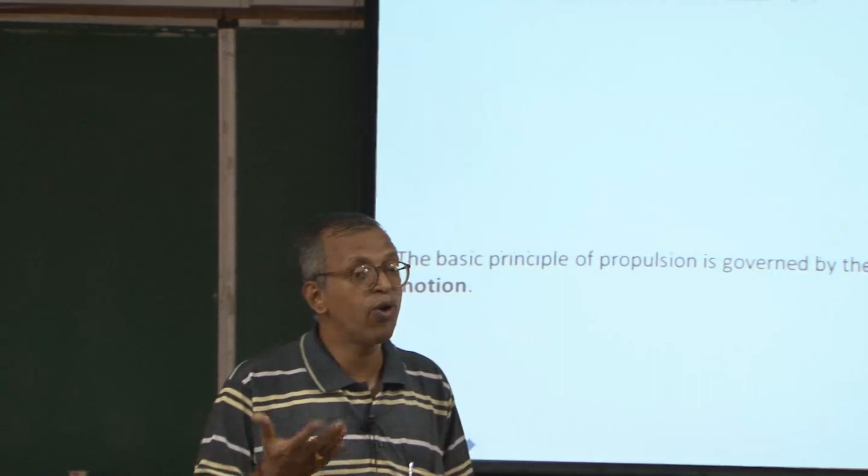When we are trying to impart motion to a body or object, what do we need to do? We will have to apply a force. Is it possible that we apply a force and just start moving? Certainly not - it must be an unbalanced force such that it overcomes the inertia or resistance, and it must be in a specified direction, meaning a particular direction, whether forward, backward, or sideways.

So this definition clearly indicates the existence of a body and a force to drive or push a vehicle, and this motion will be in a preferred direction, the desired one.

For example, if I walk, is it in a preferred direction? How am I walking? Am I applying a force or not? And if I am applying force, how is it acting on the body? All of you will know these questions, but we will discuss it just to make it clearer and have a feel for it.

So these are the basic principles of what we mean by propulsion. Now, when you talk about propulsion, suppose an insect is moving, or a snake is moving on the grass or ground, or a fish is moving in the water - will you call it propulsion, or will you call it something else?

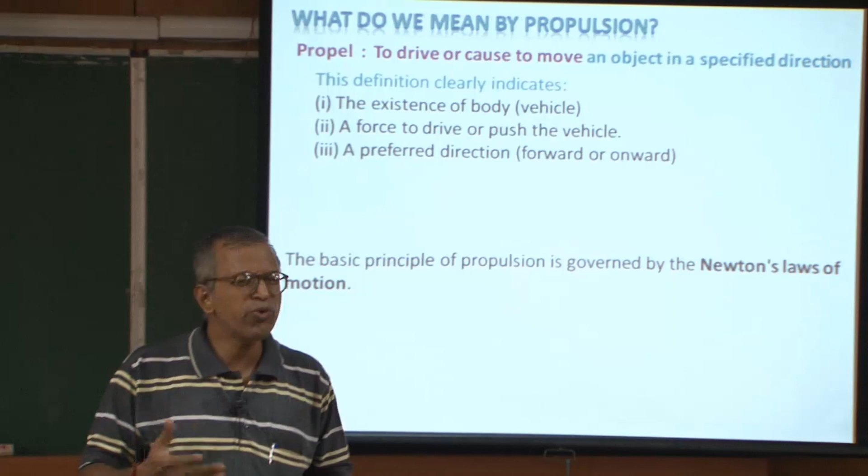Naturally it is propulsion, but we never use those terms whenever it is moving very often. However, because it is related to motion, it is related to applying a force which causes motion in a particular direction, therefore we call it propulsion.

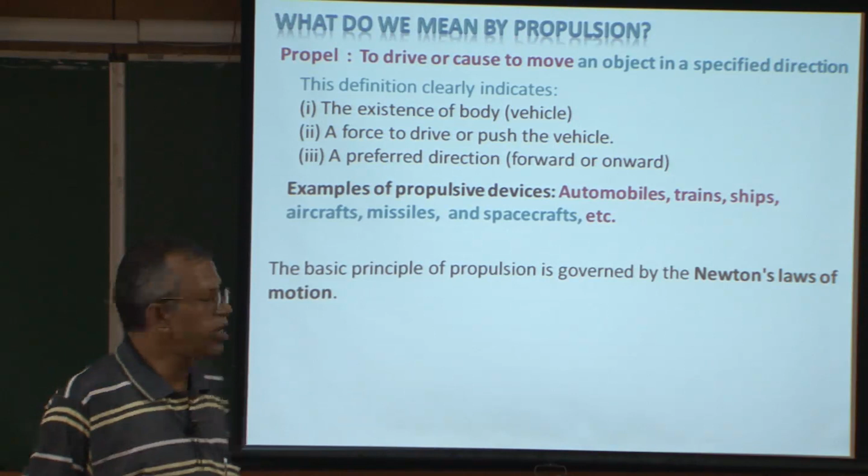However, there are several devices like automobiles, trains and ships which need to be propelled, and for that we need engines. Similarly, in aerospace propulsion, the propulsive devices are aircraft, missiles and spacecraft, and several others one can think of, but we will be concentrating on this.

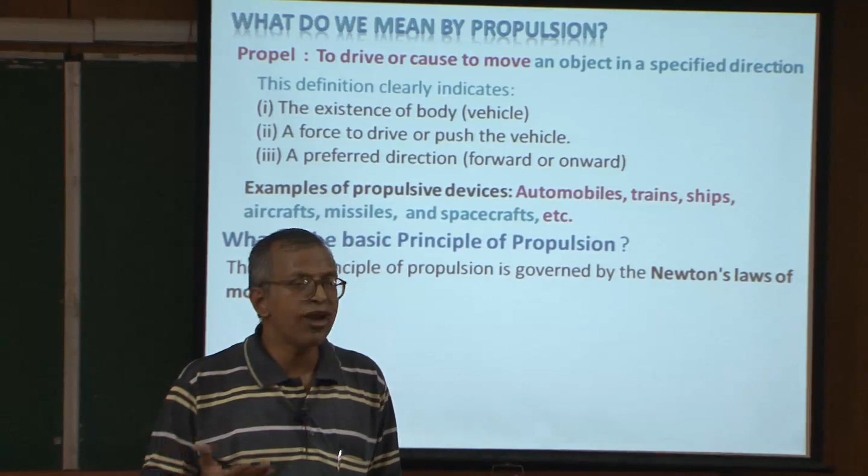Then the question arises, what is the basic principle governing the propulsion process? We know that one has to apply a force and it will cause a motion. Now, whenever it causes motion, then naturally the laws of motion come into picture.

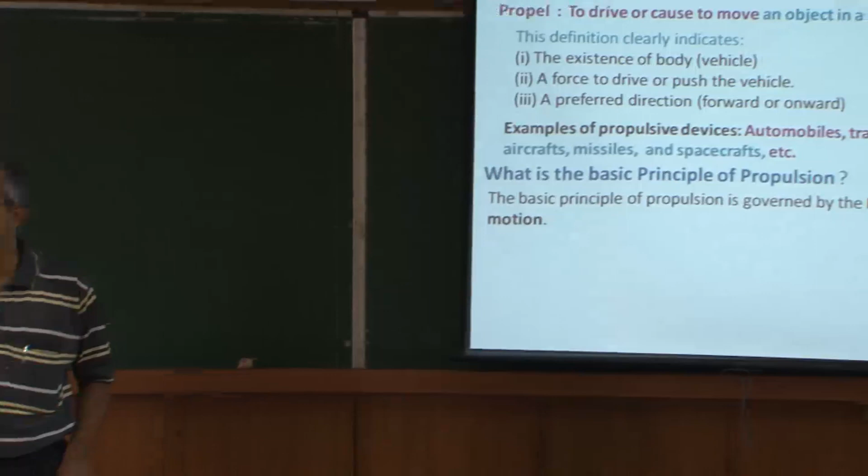You must have studied all these things in high school, but do you have a feel for it? What are these laws - first law, second law, third law of motion? Some of you may tell me in words, but did you experience those things? That is more important than mugging it up or remembering laws or applying them mathematically. I will take an example of whether a child experiences these laws or not.

If you look at a child, maybe 2 years or 1.5 years old, will they be experiencing these laws of motion or not? If they are experiencing it, why is it that when we grow up we are not experiencing it? I will give an example of how they experience it.

You might have observed a child keeps a toy in one place, moves around, and comes back to see whether the toy is lying there in exactly the same place. Let's say a baby or child is playing with a toy car, and you push the car in a particular direction so it moves and reaches somewhere, and you are catching, let's say, a ball - a lot of children like to play with the ball.

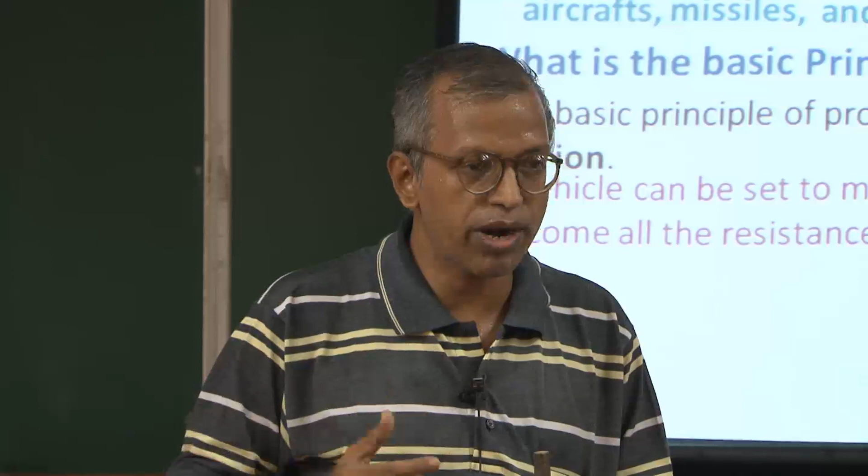Right, then only it will make a move, or motion is imparted to the body. Now if you look at what really changes whenever an unbalanced force is acted upon a body, there will be a change in momentum. That means rate of change of momentum will be proportional to force. So therefore we call this the second law of motion, and this momentum will be in the direction of the applied force or the unbalanced force. So unbalanced force acting on the body produces an acceleration because there is a change in the momentum of the body.

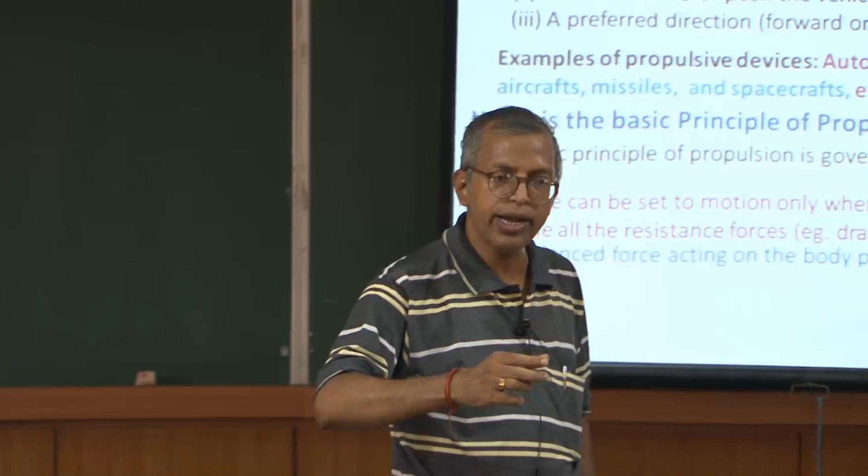Mass can be changing, or velocity, or both of them will be changing. But when we consider the mass to be constant, then change in velocity with respect to time we call acceleration. So therefore, generally we consider the second law of motion, in which unbalanced force is proportional to mass and acceleration of the body.

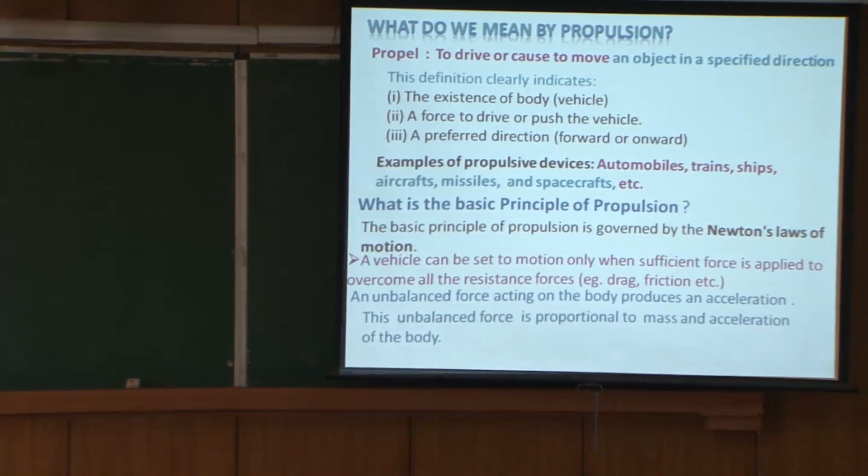It can be expressed as a mathematical formula which all of you know: F is equal to ma. F is the force, m is the mass of the body which is about to move, and a is the acceleration imparted to the body due to the unbalanced force, and the direction of this motion will always be along the unbalanced force, and force is a vector quantity, as all of you know. So this is the second law of motion.

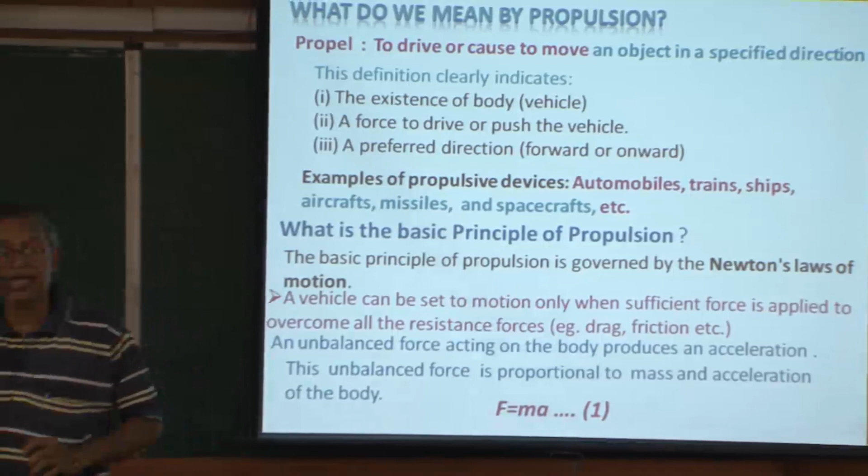Then what is the third law of motion? Every action has an equal but opposite reaction. When you talk about this, for every acting force there is an equal but opposite reacting force. What is the meaning?

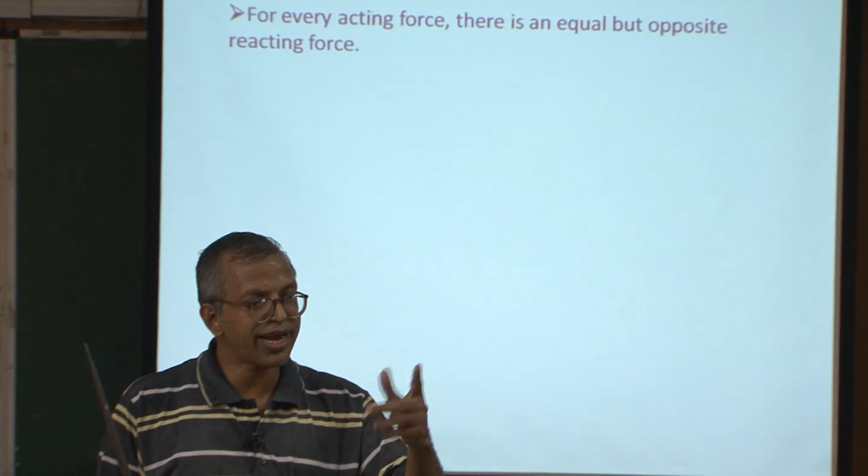So as I told you, to impart motion to a vehicle, a reacting force must be acting on the vehicle, that is very important, otherwise there will not be any motion. I will take an example, this is a cannon, right.

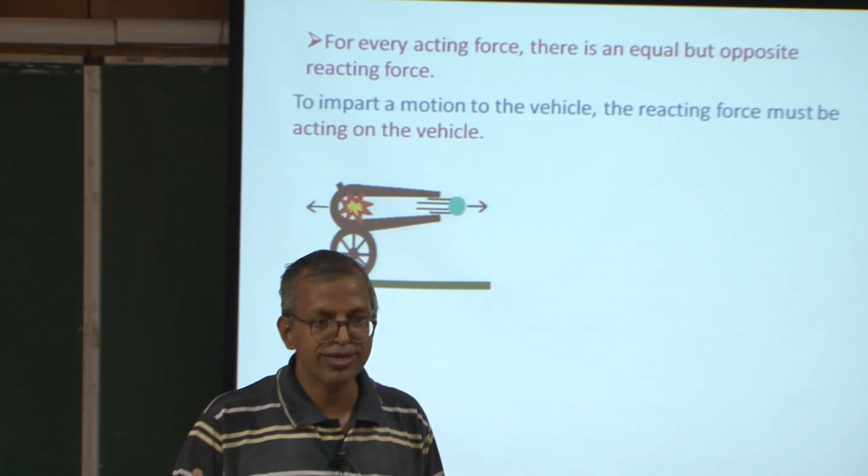Cannon will be imparting a motion to a ball which is there due to the explosion inside the cannon. As a result, the acting force will be on the ball and the reacting force on the cannon. Now, if you look at this cannon, its mass is very, very high as compared to the ball's mass. So therefore, the opposite force which will be acting on the cannon will be very, very small.

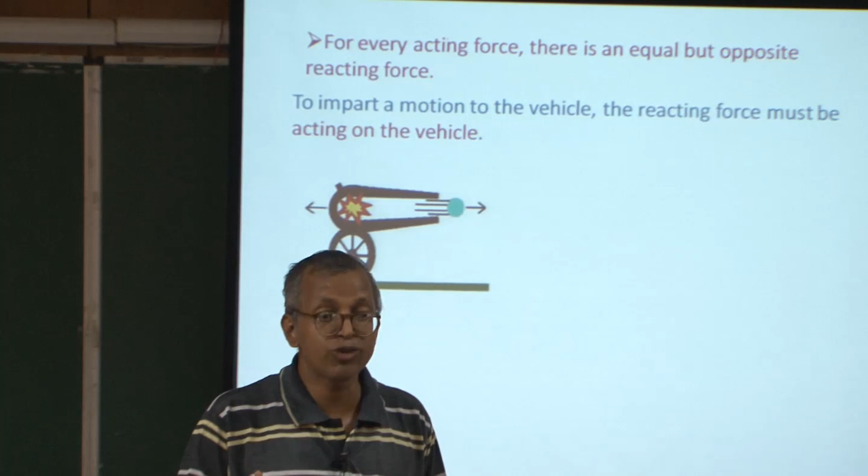I remember that when I was in high school, I was in NCC, my instructor asked me to keep the butt of the gun, that is the 303 gun, along with the body, but unfortunately I did not listen to his advice, and I got a pain whenever I triggered the bullet and it came and hit my body, because it is moving. So, opposite reaction is there.

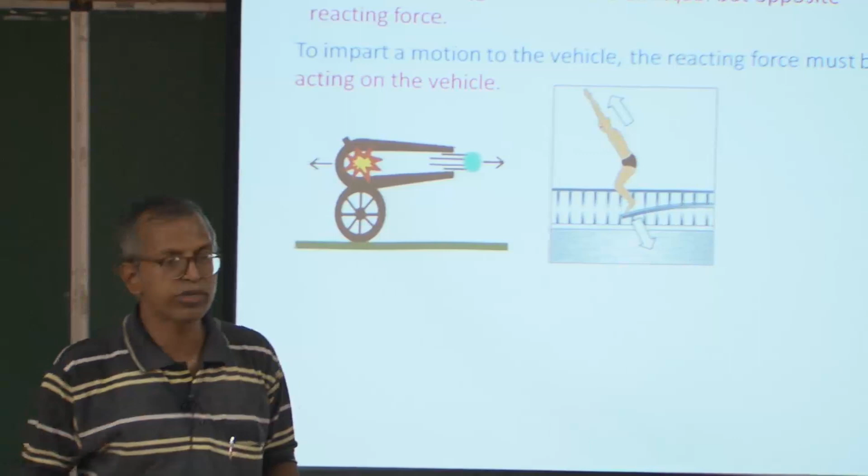Similarly, several other things one can think of. For example, in the swimming pool, there will be a springboard on which you push, and then you get jumped and put into the swimming pool. So, this is another example. The way we walk is also by the third law of motion.

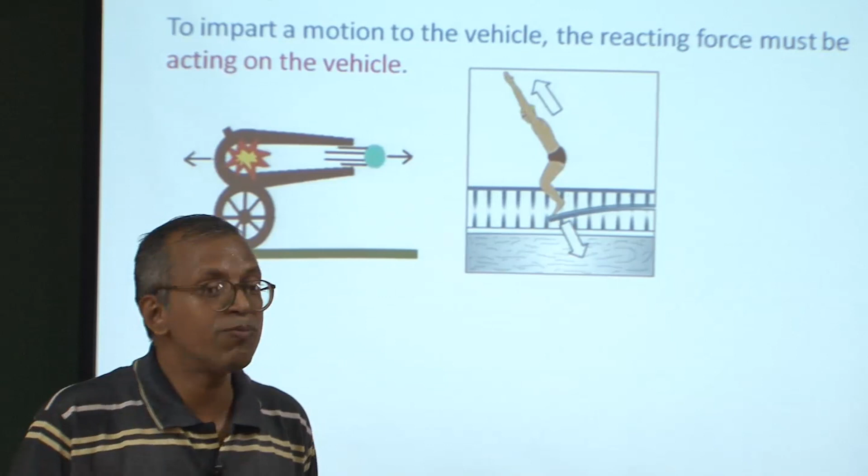And in our scriptures, we talk about every action having an equal but opposite reaction, that is known as the law of karma. Some of you may not be knowing what that is. Nowadays people are not worried about it, but it is very important to look at that law of karma, which is similar to the third law of motion.

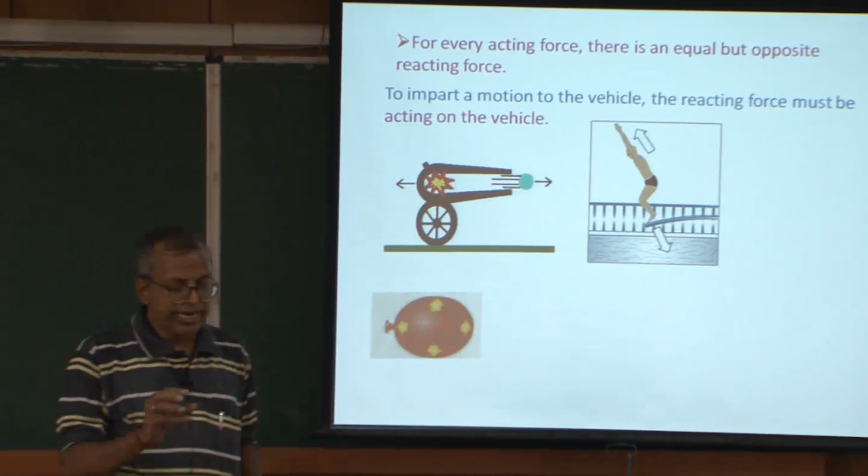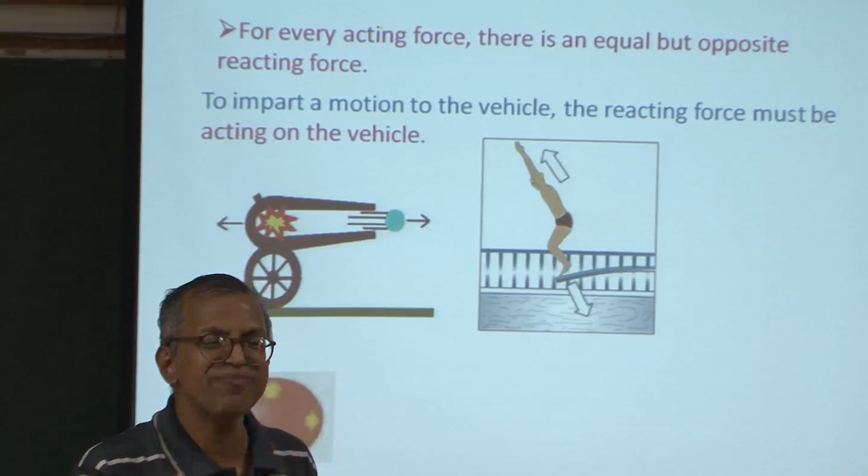So, we will take a balloon which is inflated and it is in equilibrium because the pressure acting on this balloon is in equilibrium with the atmosphere. However, it is having higher pressure. You may think how it is happening, because it is an elastic medium. So, whenever it is in equilibrium, if I remove this stem or allow the air to move, what will happen?

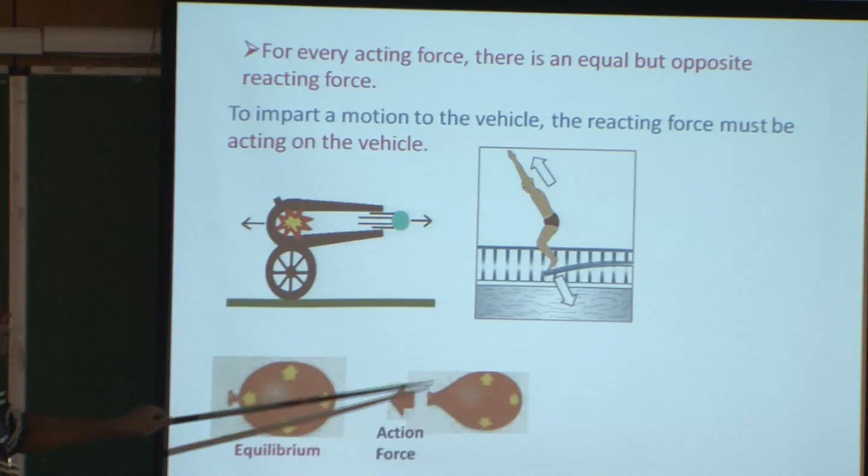The air will be moving out of this balloon and there will be an acting force, or the action force, and there will be a reacting force along with this direction. As a result, the balloon will move away from the same place.

This is a typical experiment that people do, at least it is there in the high school book, but nobody does the experiment today, either in high school or secondary school or even in engineering college. That is the fate of our education system, which is very bad.

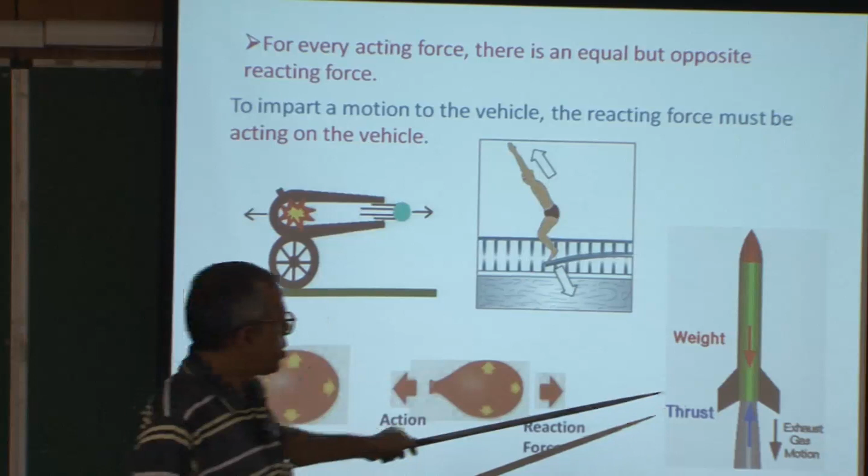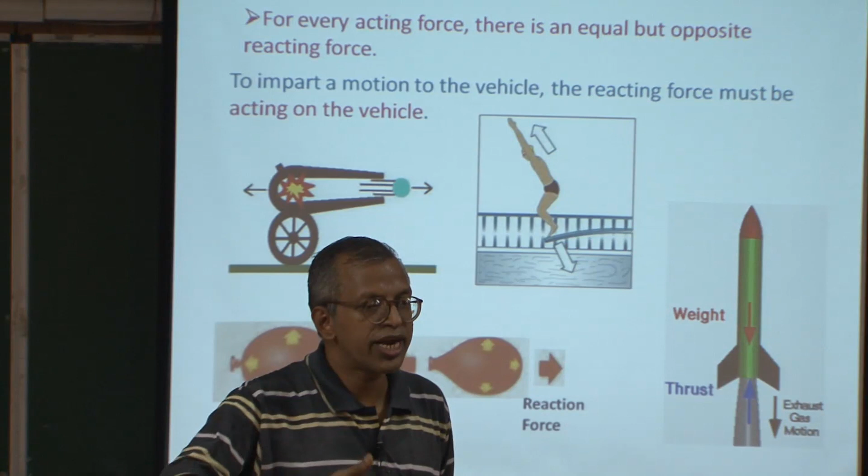Now, this is the basic principle by which rocket engines work. I will show you a figure where the hot gases will be ejected out of the nozzle. As a result, it will impart a thrust, which must be much higher than the weight and also the frictional forces, the drag, so that it will make a move. So, this is the basic principle of rocket propulsion.

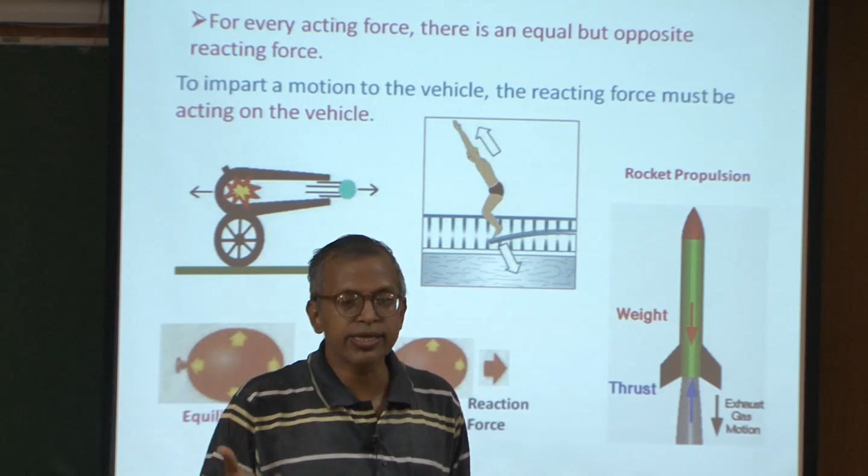Now, we will take this balloon and look at what the gas turbine propulsion will be. I will take an example. But before that, I would like to ask you, we are talking about aerospace propulsion, but is there any occasion for us to think about life propulsion? That means we propel our life. You take a birth, from the birth to the death is one journey in a particular direction. Have any of you wondered how I will propel my life, so that my life will be smooth and good, I can contribute, I can reach an excellent state?

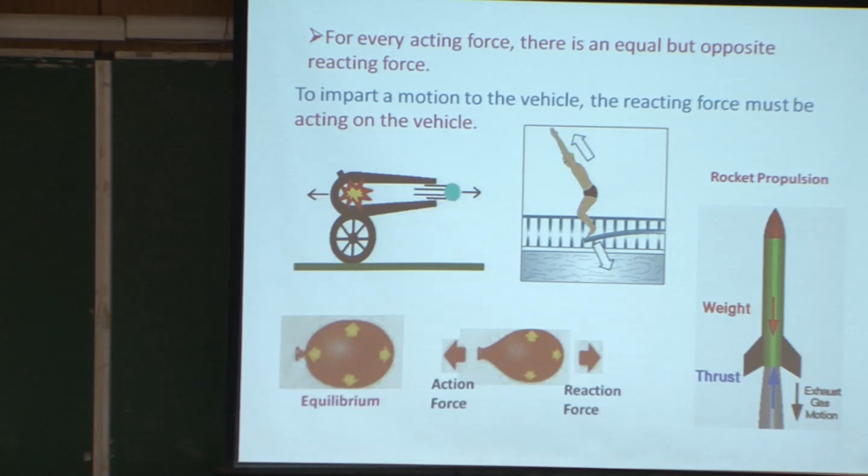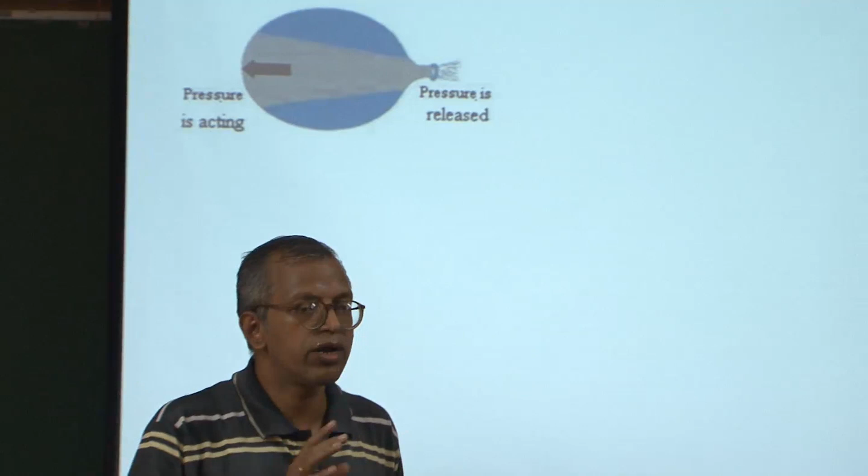I do not think so. Some of you might be thinking, or some of you may not be thinking, and that is the main objective of all education according to me, not what we do. So, I would urge you people to think about this important aspect of how to propel a life, which is more important than your aerospace propulsion. Because of that, people do not know how to propel a life. All the problems we are facing in society are caused because of not adhering to the principles of humanity.

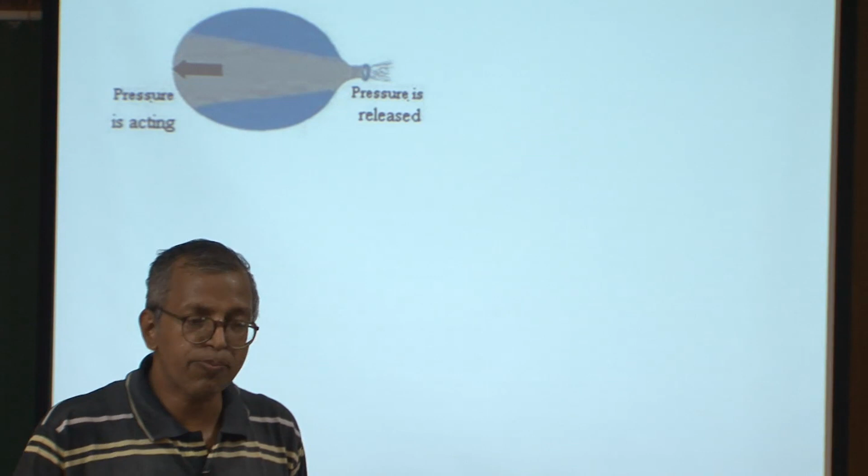So, I do not want to get into that, but rather let us say that there is a balloon which is acted upon by pressure, and the pressure is released, and whenever the stem is opened, it will act like a nozzle and it will move. But what will happen after all the pressurized air goes out? Then the balloon will be flat and it will not move at all. Suppose I take this example or analogy, I will think of how to make it continuous. What is the way? Can anybody tell me?

I want to make it move. So, what is the way out? Make my balloon move forever, or as long as I wish. That means I need to supply the air continuously. How can I do that?

I can think of pushing some air. What will I have to do? I will have to think of using a compressor, or an air intake. But the compressor will have some mechanical component, a mechanical rotor which will move and ingest the air into it.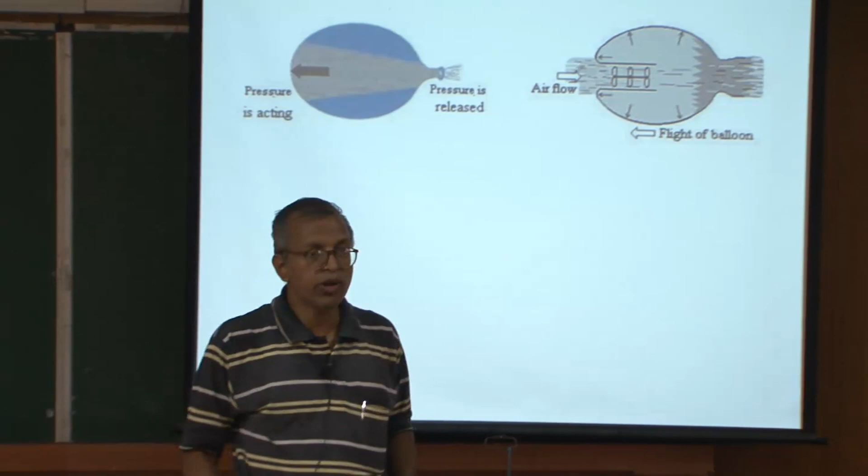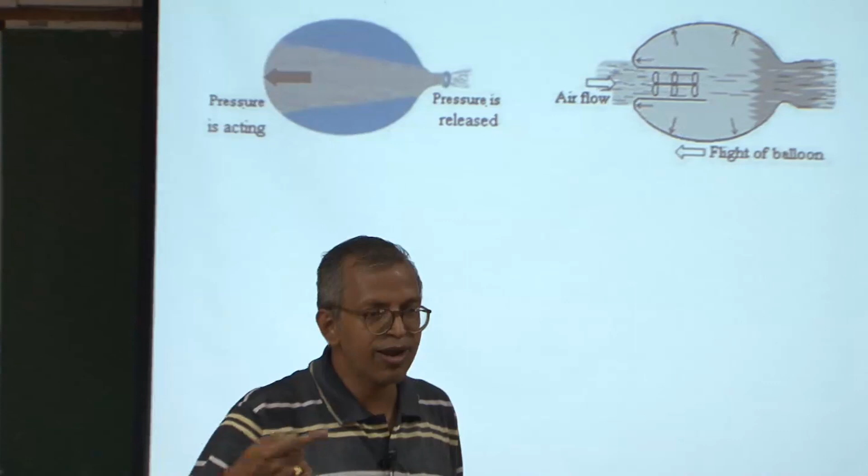But whenever I have this movement of the compressor, I need to move it. How will I make this compressor move? I will need another device which gives power for the compressor blades to rotate, so that air can come in.

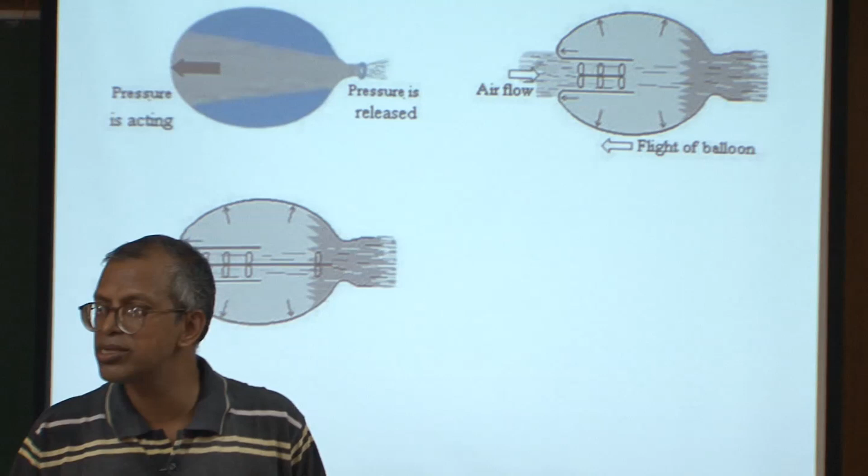And for that I need a turbine. But how will this turbine move? It cannot move on its own. So naturally I will have to give some energy, because if I ask where does this force come from, it comes from energy. Without energy, can I have a force? Certainly not, it's not possible.

So what will I have to do? I will have to use energy. Energy can be any source - it can be chemical energy, nuclear energy, solar energy, or any other form. Energy has different forms.

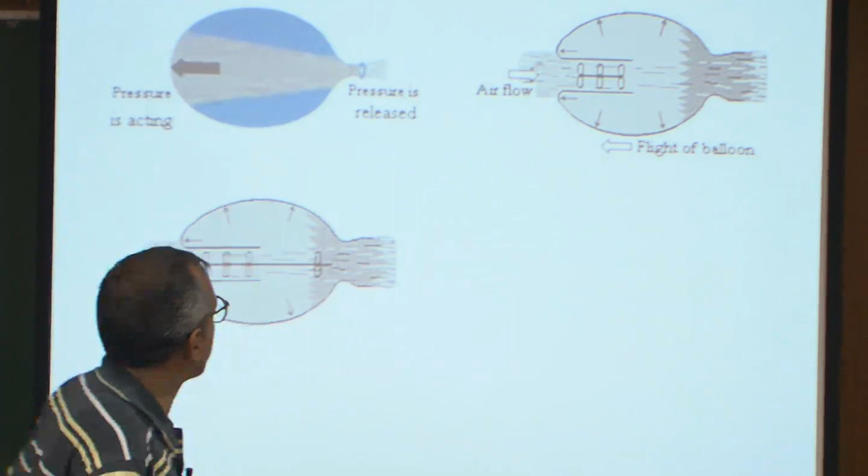So I will have to use some energy source so that I can extract mechanical work in the turbine, which will run the compressor. For that I need a combustion chamber where I will be using some chemical energy, for this example.

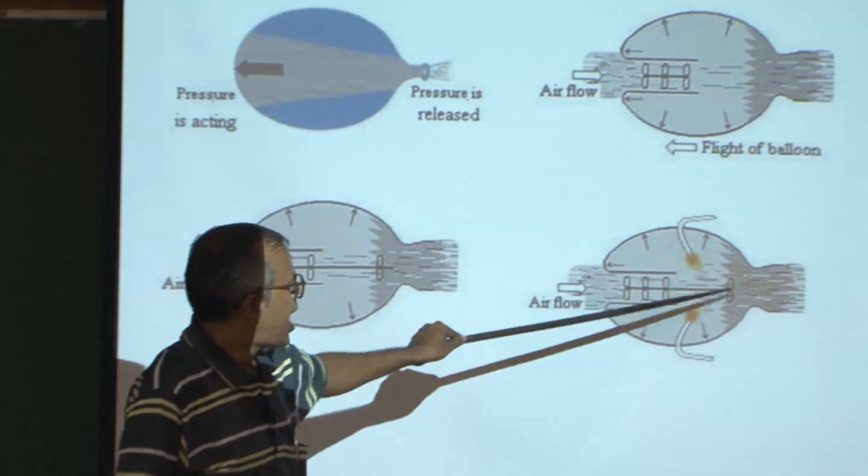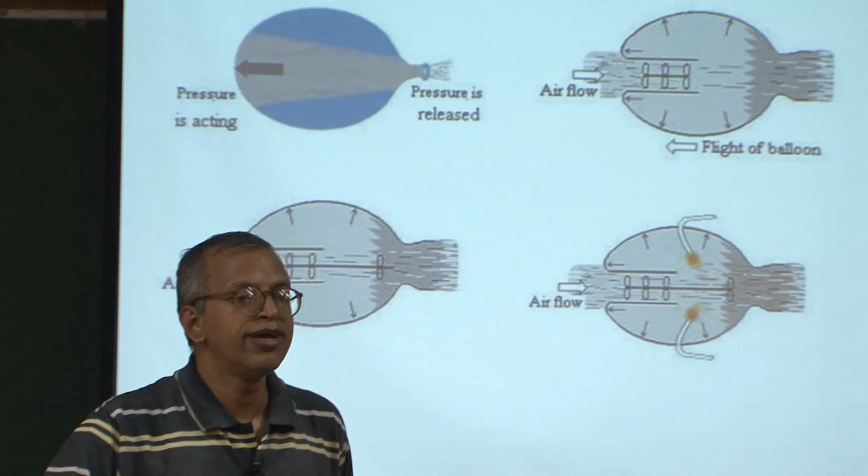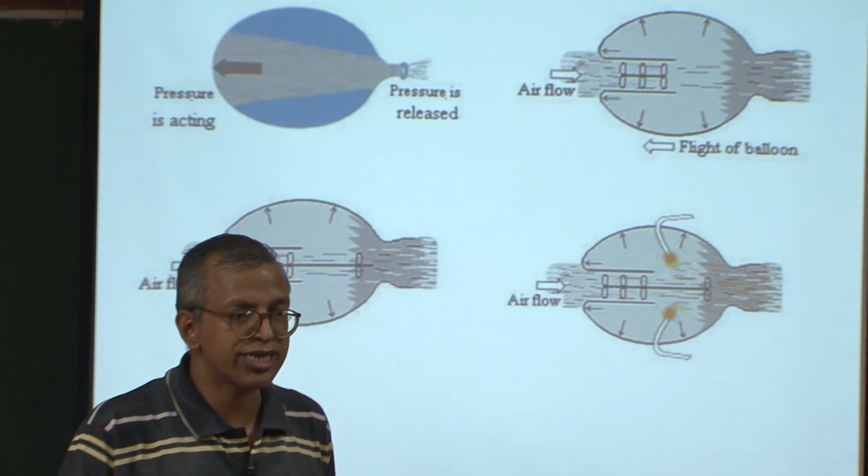If you look at a gas turbine, how many components does it have? One is the air intake through which air enters the chamber, and the compressor which sucks the air and raises the pressure. There's a combustion chamber which gives energy to sustain it. It's expanded in a turbine, and this hot gas is expanded further in a nozzle to give thrust. This comprises your gas turbine engine - this is the balloon analogy of a gas turbine engine.

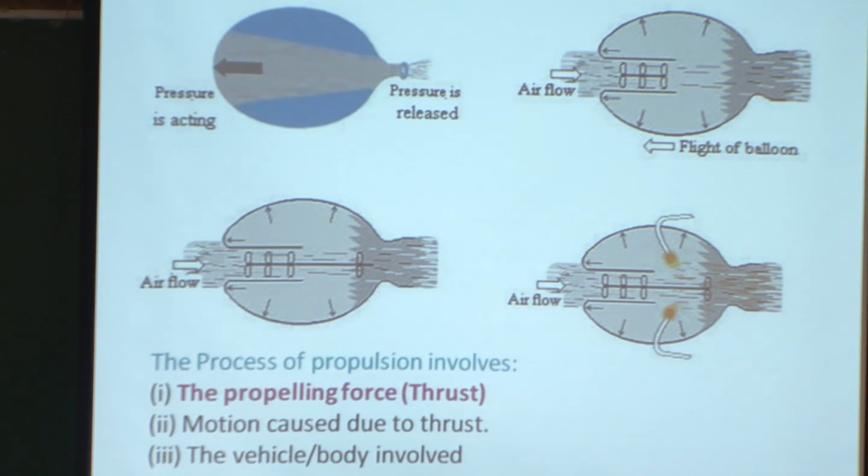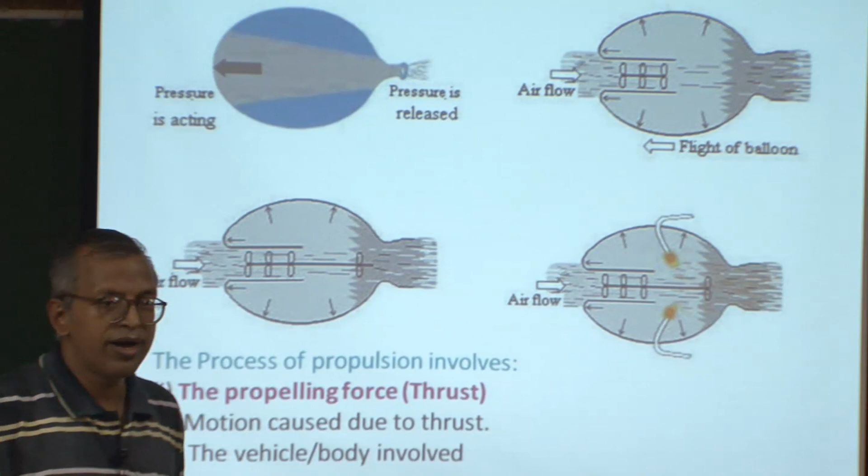If you look at all these concepts, there are three components - the processes involved in propulsion are three. One is the propelling force, the thrust. Another is motion caused due to the thrust, which is basically flight dynamics or aerodynamics, and vehicle body is involved. Whenever we talk about the body, it is basically a structural thing, so that becomes structural engineering.

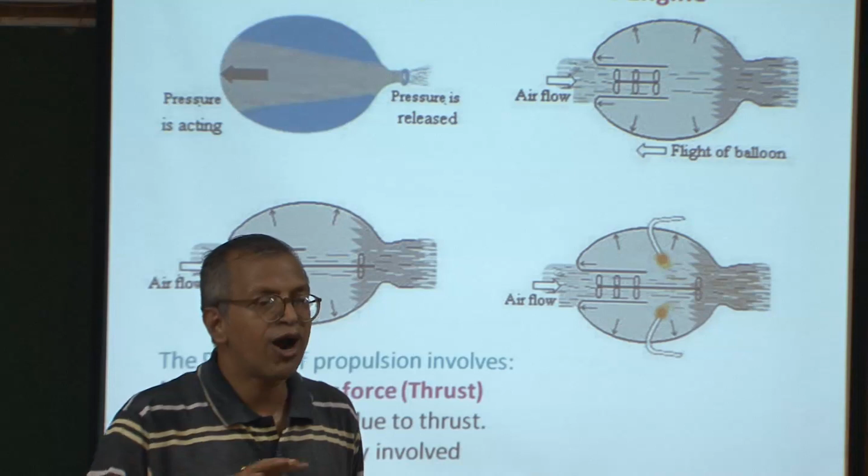Then we will be looking at propelling force, which is the force we will try to generate, and whenever we generate this force we need to use energy. We will be thinking about how to use this energy for generating a torque or a thrust or a force, such that it can make the vehicle move. So the whole scope of aircraft propulsion or aerospace propulsion relates to how to utilize this energy for generating thrust or force, to make it move or impart motion to a vehicle.

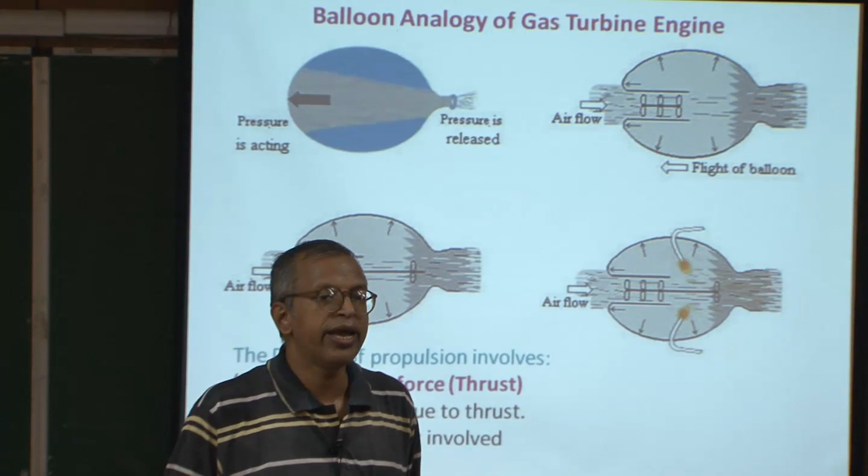This is the part we will be concentrating on - we will be looking at the aerothermodynamics of propulsion. With this, we will be covering the subjects in the following manner, as I told you.

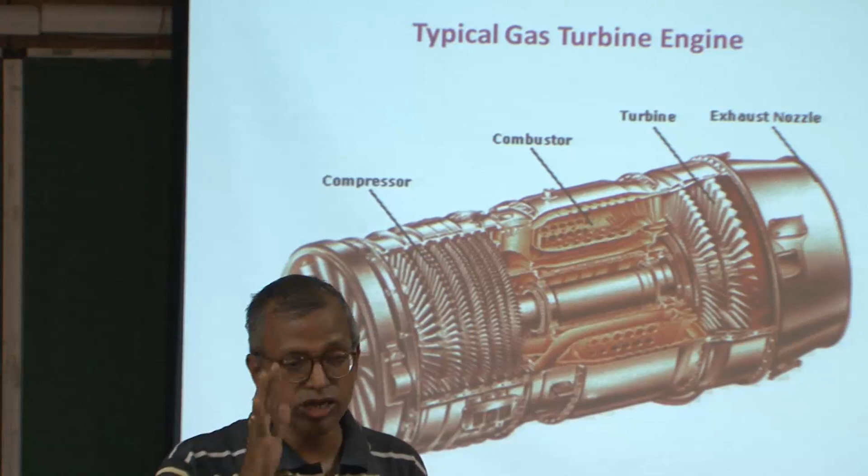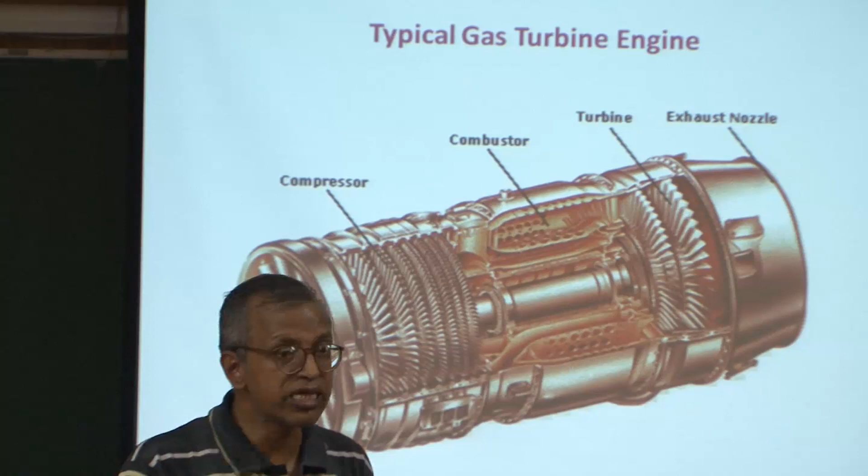In this course, I will start with an introduction to propulsion. I have already introduced some aspects, but I will give you an overall view of the whole gamut of propulsion in a nutshell, and then we will concentrate only on the gas turbine engine and the rocket engines.

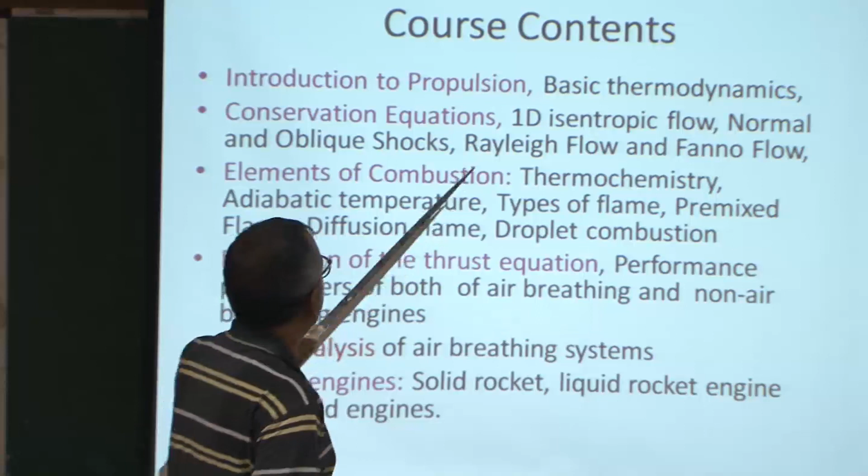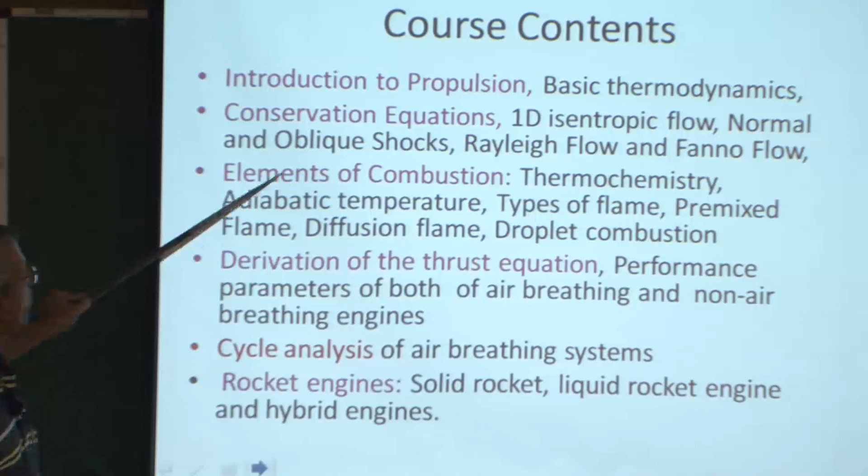For that we need to review the basics of thermodynamics. Then we will look at the conservation equations we will be using, that is one dimensional isentropic flow, which occurs at high velocity and may lead to the formation of shocks. So we will discuss normal shock, oblique shock, and then move into Rayleigh flow and Fanno flow. Some of you may already know these, but we will recapitulate and relook at them from a different angle. Since we will mainly be dealing with chemical energy for our propulsion devices, we will also look at the elements of combustion.

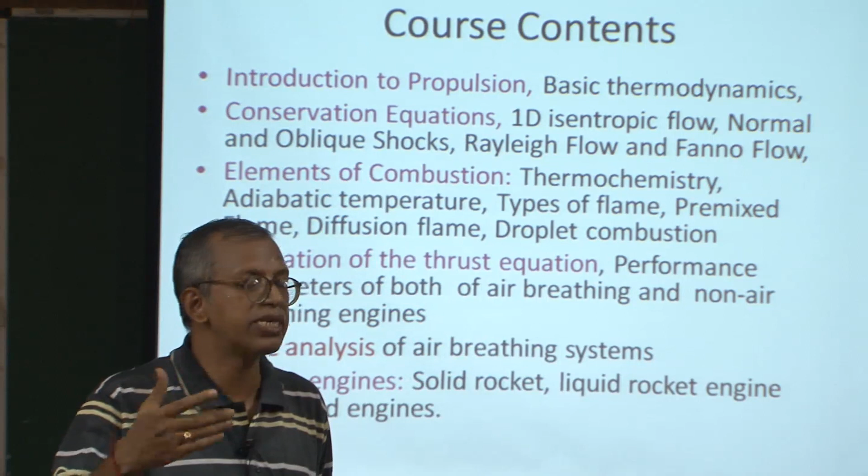This portion of the course will be covered to make you adept in the fundamentals required to delve into aerospace propulsion.

After this, we will look at the derivation of the thrust equation, covering performance parameters for both air breathing and non-air breathing engines. Then we will look at cycle analysis of air breathing engines, including real cycle analysis and ideal cycle analysis, and how these can be used for the design of an aircraft or aero engine. Finally, we will briefly look at solid rocket engines, liquid rocket engines, and hybrid engines.

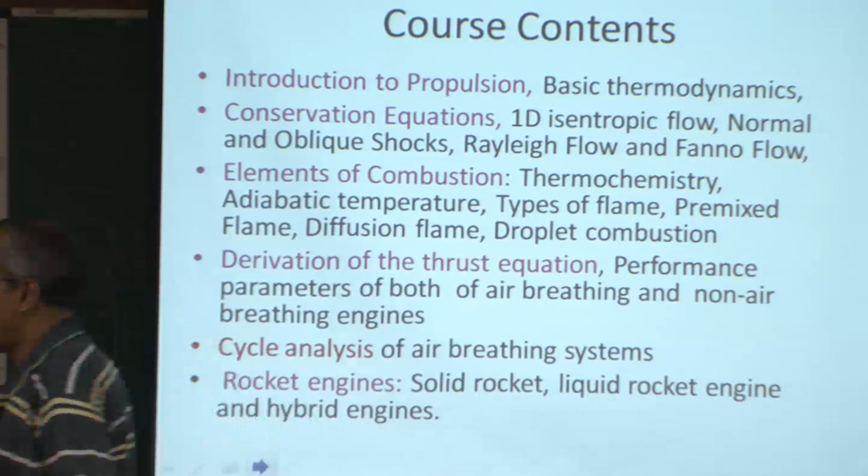We will be referring to several books, which I have jotted down a few of. For the aero engines we will look at Gas Turbine Propulsion published by Anamaya, and for fundamentals of combustion we will look at a book by myself, D.P. Mishra. For engineering thermodynamics we will look at some portions by Cengage. Besides this we will refer to Mechanics and Thermodynamics of Propulsion by Hill and Peterson, the classic book Rocket Propulsion Elements by Sutton and Biblarz, and Aerothermodynamics of Gas Turbine and Rocket Propulsion by Oates.

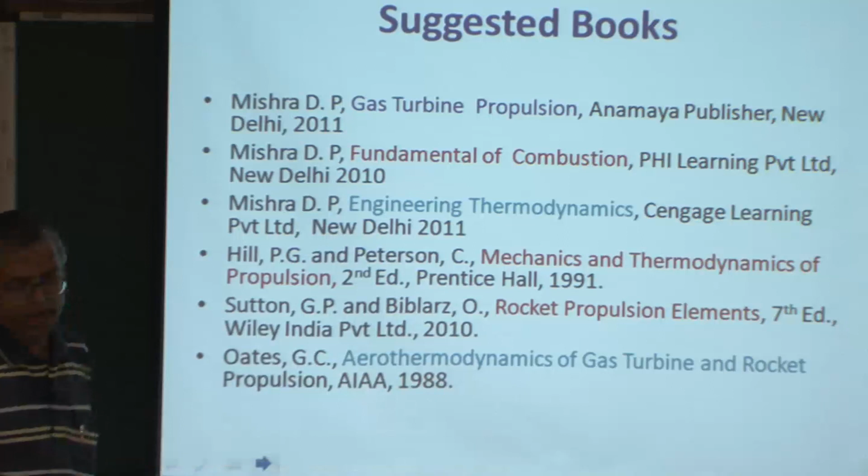All these books, except the first one, are available in the library, and I hope you can use them. You can refer to any other book as a matter of fact.

My suggestion would be that you try to have your own notes, which will be useful to cater to your needs. Now we will move into the history of propulsion.

Question arises, why look at history? Because it is a very boring subject, at least to me it was quite boring to look at history. Some of you may not like to look at history, although our mind always moves to the past or to the future, but rarely remains in the present state. That is the nature of the mind. So we are always brooding about the past or imagining about the future, whether bad, good, or ugly. However, we need to look at the history of propulsion, or the history of anything, just to see what we can do so that we can act today for a better future.

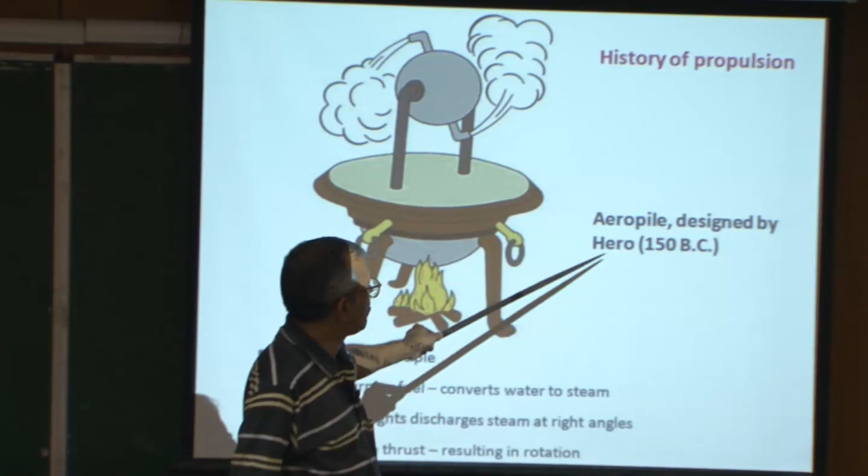So therefore we need to look at the history of propulsion. I will just give you a bird's eye view of it. It is a very vast topic, but if some of you are interested, you can make a term paper on that. I will start with an Alexandrian scientist who was living in Alexandria around 150 BC, his name is Hero.

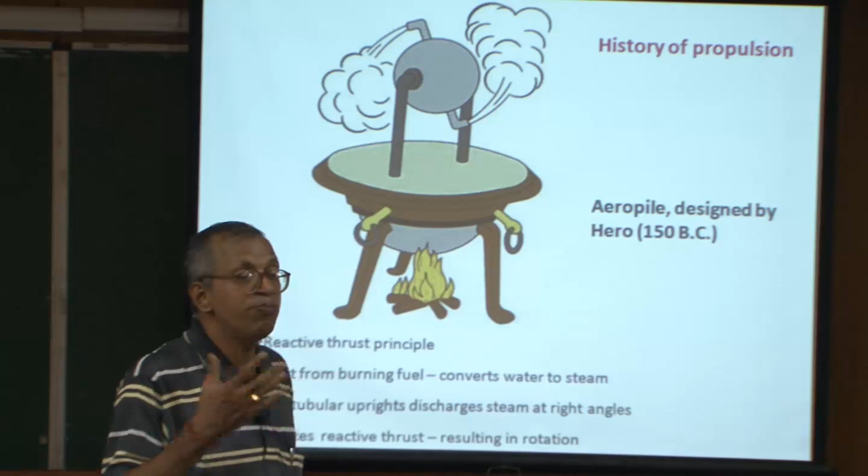He designed an aeropile device in 150 BC, before Christ, and came up with a device which is shown here. I think it looks a little awkward to look at today, it is not compact or jazzy, but it still demonstrates a very great principle.

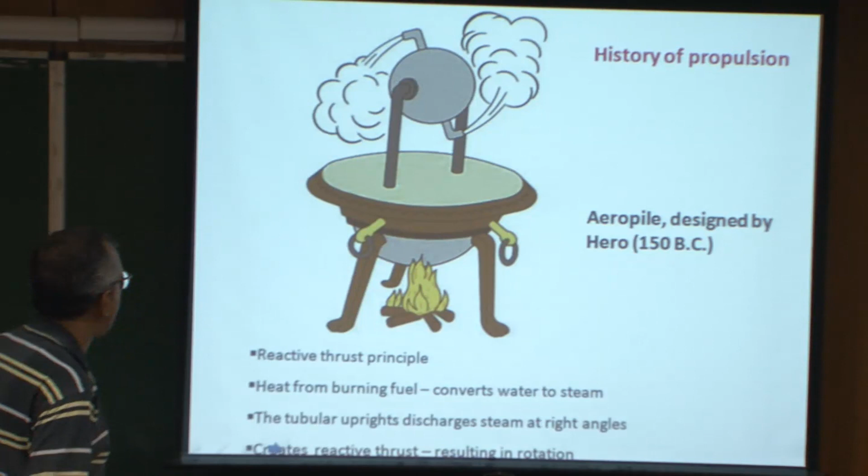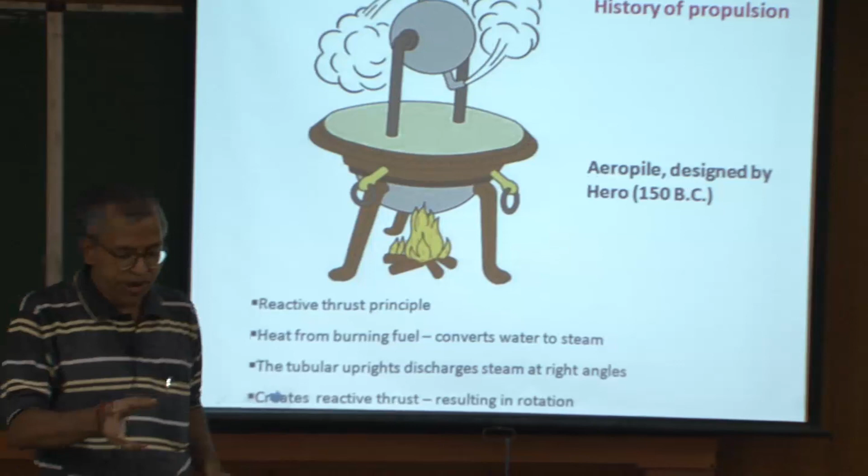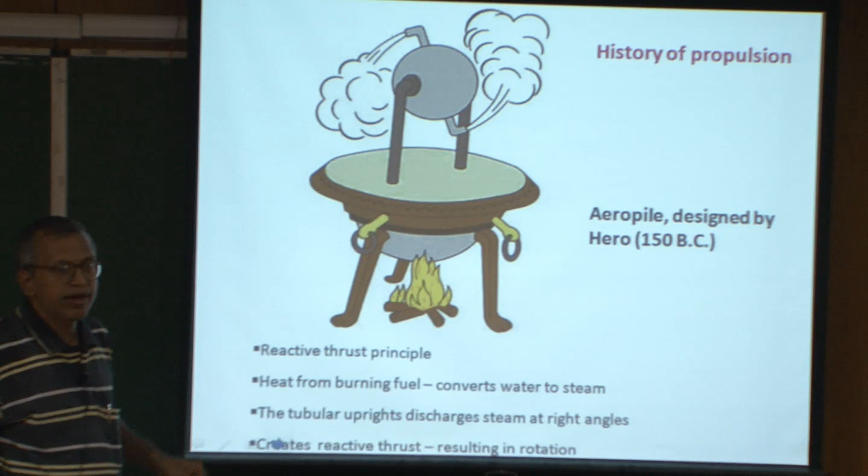For example, it contains a bowl which is shown here, and this bowl contains water, and it is closed with a lid, and from this lid there are upright tubes which go to this spherical, hollow chamber. And similarly, this is having another upright which is connected.

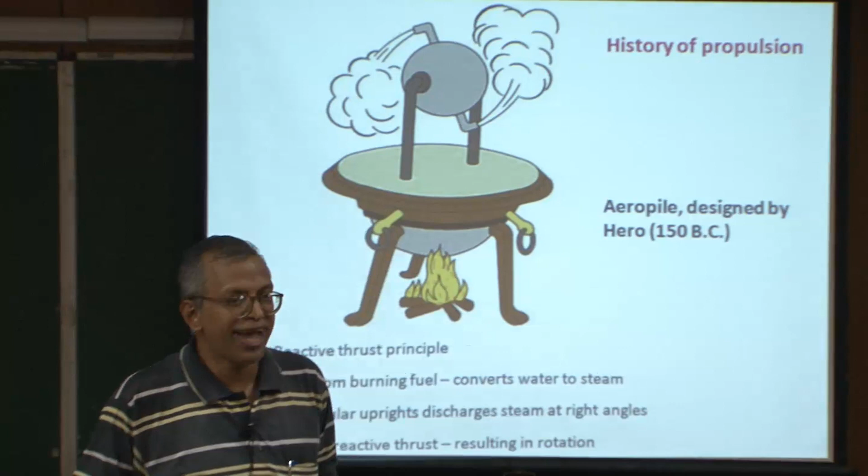Keep in mind that this hollow sphere has two nozzles in opposite directions. Whenever this water is boiled, steam is formed, using wood as fuel. Earlier days wood was a major fuel, and in future I guess that will be the only fuel after maybe 50 or 100 years, because it is renewable in nature. So this steam, when it is ejected through this nozzle, gives you a couple, and that is nothing but your reactive forces or reactive torques.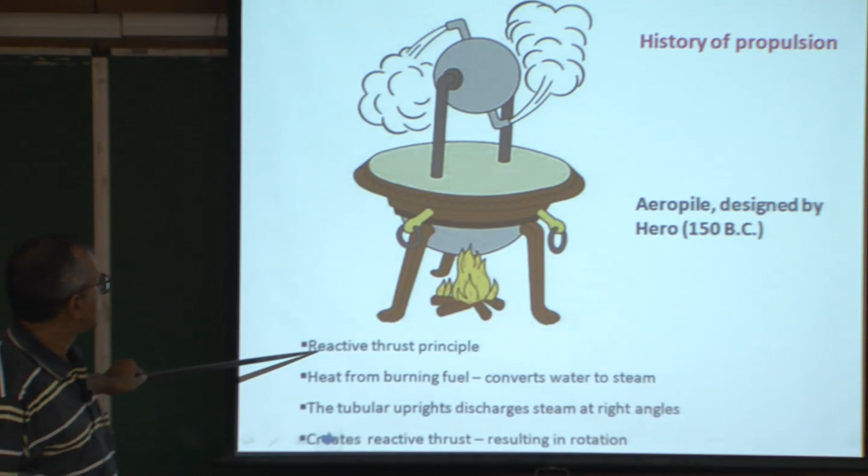That demonstrates the reactive thrust principle. If you look at 150 BC, people did not know what the laws of motion were, but they devised this thing, they came up with this idea. It is a marvelous idea when I think of it. It may look trivial today, but if you look at 150 BC, it was a great thing.

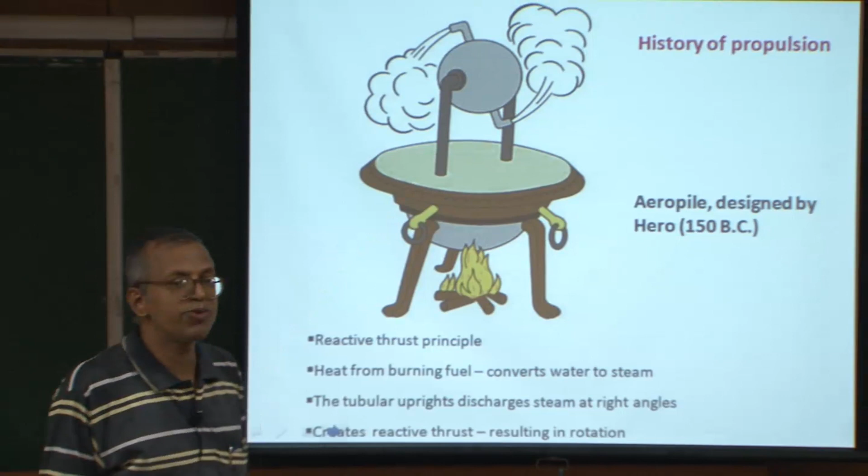What this says to us, as far as history is concerned, is that you should not be bogged down by the principles which are not yet established, but you can still do the design, you can think it through—that is the mind. In modern days, people's minds are restricted and constricted by these laws which have been formalized. Newton came in the 17th century, but Hero, who was really the hero, found out what was to be done, and this principle was utilized later on for development.

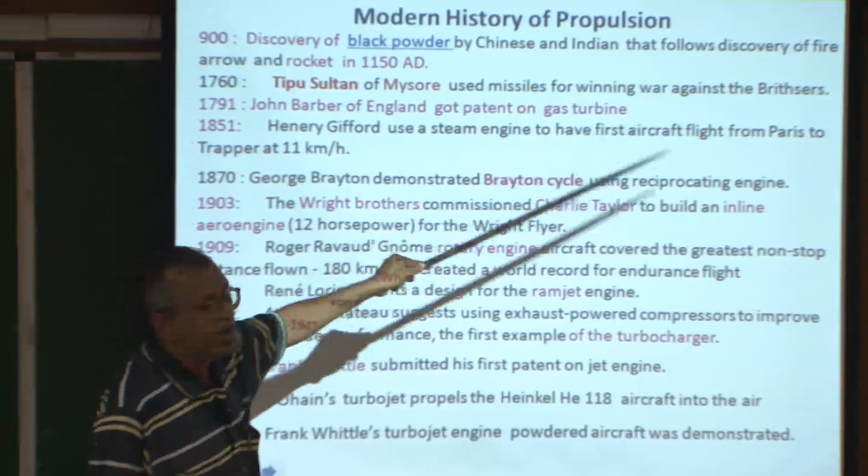Now, I will tell you a brief history. Around 900 AD, the Chinese, and of course there is a controversy about whether Indians found out the black powder. Do you know the constituent of this black powder, also known as gunpowder, which you use for your rockets and for bombs in Diwali festivals? And then they found out the way of attacking or defending against enemies, the discovery of fire arrows.

Later on, around 1150 AD, the Chinese made a rocket similar to our toy rocket if you look at history, but it made an epoch, had an impact. Later on, the Mongols and other warrior groups in Arab countries, and the Japanese like samurais, learned those techniques. So also Indians, and it spread everywhere because it was driven by winning wars. So if you look at today, the arsenals and aerospace-related things are being misused and abused by armies and politicians—this is very important to note.

So therefore one has to worry about this. There are several other things which I am not talking about. In 1760, Tipu Sultan of Mysore fought 4 wars, and he won 3 of them, creating havoc, but unfortunately he lost the 4th Mysore war to the British and was killed. They were using what you call missiles or rockets. Basically he is the missile man—although in modern days we know Abdul Kalam as the missile man, Tipu Sultan was the missile man of this country, having created a lot of things.

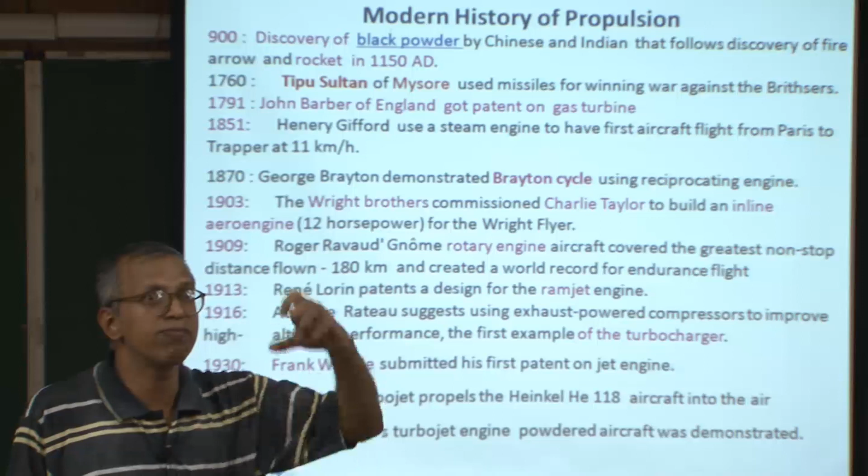A normal man can walk maybe 7 to 8 kilometers per hour. But what was the thing? I guess when I investigated, I found that there was a balloon in that which was making it drift, and this engine, which was very bulky, was not producing any thrust. That is my interpretation, some of you may look at it. So therefore it is the wind which made the move, and it was floating only. That was my interpretation, so it is very important to look at that.

Now, having said this, if you look at the steam engine at that time it was very popular, right. I will tell you another thing, the subject thermodynamics was really developed because of steam engine. That means engineering need not come after the science. That means if you are good enough in science, it does not guarantee that good engineering should come up.

So, engineering comes first, or science of course is required to have good engineering, but it is not that way. So, in other words, what I would like to suggest is one should not be bogged down by the constraint of the development in science so far as engineering is concerned. How can you develop engineering? Then there will be some ingredients within the minds of the people that make us think. I will be discussing this a little later on.

So, if you look at 1870, George Brayton demonstrated the Brayton cycle, which we will be discussing in this course very often, using a reciprocating engine. Generally today, whenever the Brayton cycle is being discussed, it is for the gas turbine engine, but it was started with a reciprocating engine.

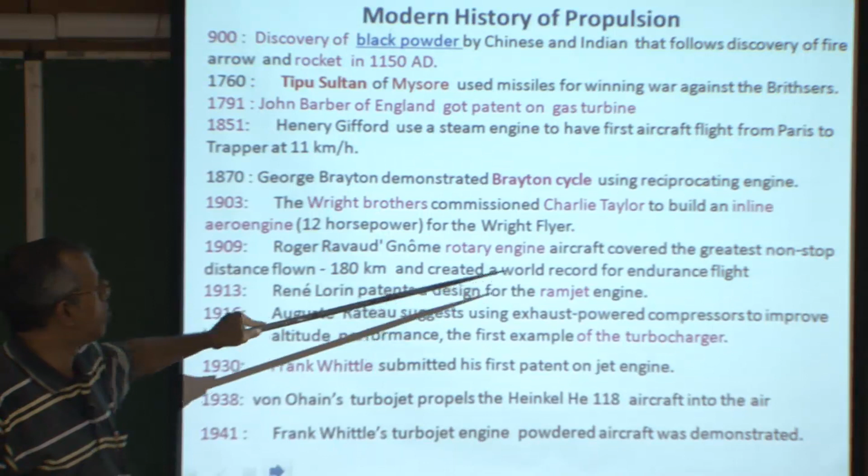And as I told you, there is an epoch-making event by the Wright brothers, who really for the first time made an aircraft fly in 1903, and that is the history being created, which used a 12 horsepower engine. And in 1909 Roger Ravaud' Gnôme used a rotary engine aircraft and covered a great non-stop distance of 180 kilometers, creating a world record for endurance flight because it was flying for a longer period of time.

And if you look at this, it is a turbo kind, quite a good event. But I am always fascinated by René Lorin, who invented two things so far as aerospace propulsion is concerned, but he invented several other things. He was a very innovative person. So, in 1913 he patented the design of the ramjet engine, and I will tell you also how he talked about the air breathing engine a little later on, that was 1908.

So, in 1916 Auguste Rateau suggested using exhaust-powered compressors to improve engine performance. That means he was the first person to introduce the turbocharger to aircraft engines. And in 1930 Frank Whittle submitted his first patent on the jet engine. Generally, Frank Whittle is known as the father of the gas turbine or jet engines, am I right?

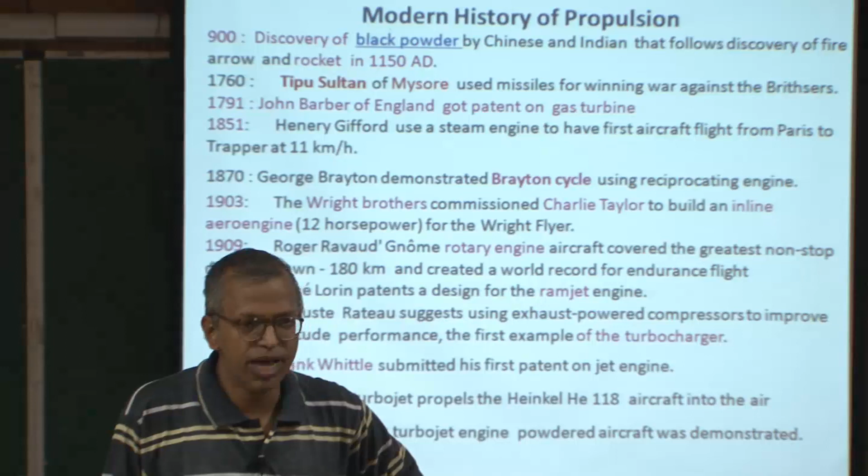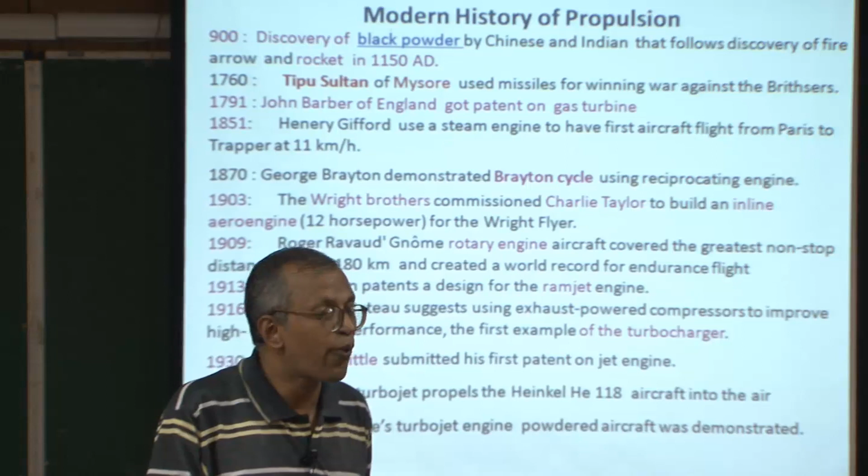But however, there is a person, von Ohain, who is really the father of the turbojet engines, who made it in 1938. Whereas of course Frank Whittle in 1941 found a turbojet engine to power an aircraft. But if you look at it, most of you may not be knowing who this von Ohain is. So, I will be discussing about it.

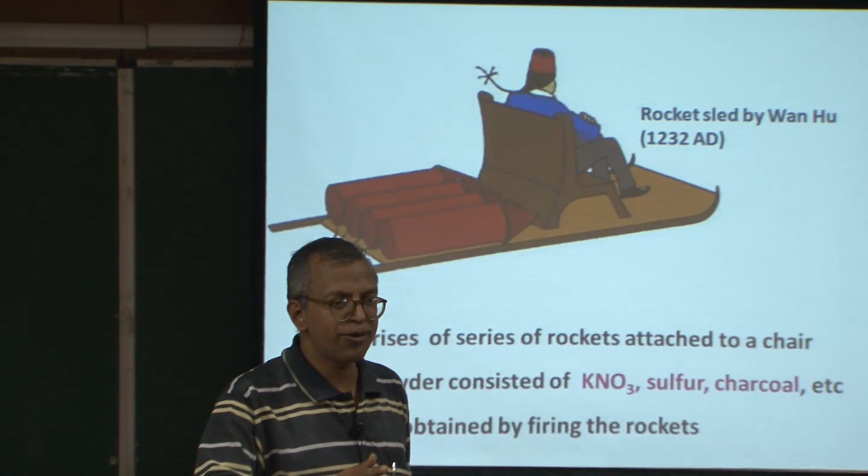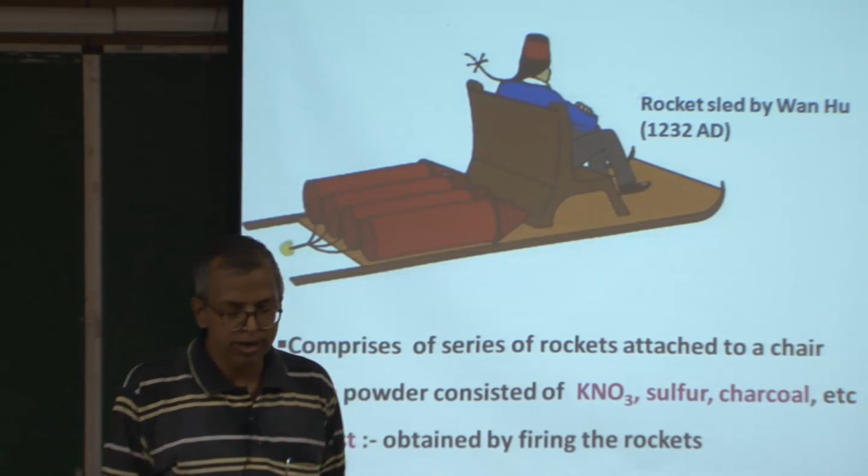I will just look at the audacity of a person, a scientist, who designed this rocket sled, right, and it looks to be very awkward to our mind, but if you look at it, he used a series of rockets attached to the sled, sat down on a chair and fired the rocket, and it flew for some time. In the process he lost his life. What a great sacrifice he has made for us to think about.

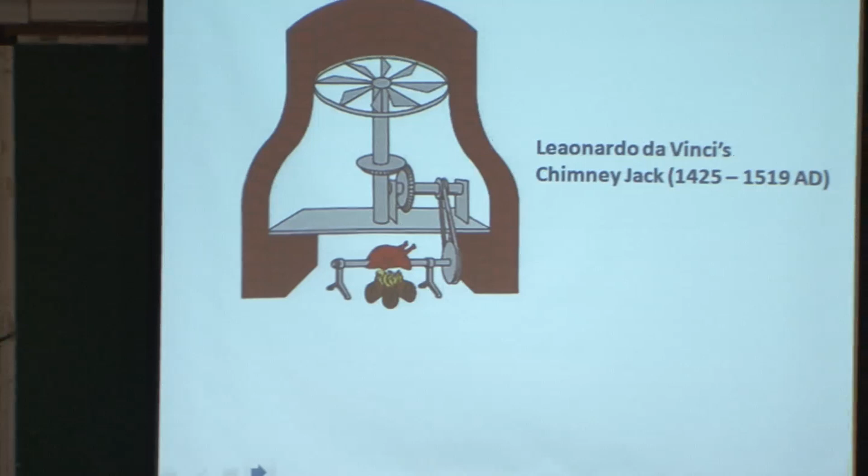Today we are very much frightened, and we are suffering from fear, right, which is being circulated by these market forces. So, therefore, I am always fascinated by another person who is a visionary, who is basically an artist. He was not a scientist, but the kind of imagination he was having is much higher than a modern engineer can think of.